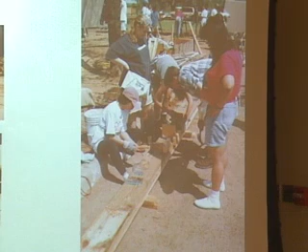So here's what I'm saying. On the right here is Beatrice, and this was her house. She had a family with 2 young daughters, and she came into our studio, and we competed against each other in teams to try and come up with the coolest house to build for her. As you can see here on the left, this was my team's proposal. We built the model out of basswood. It was precious. It was a beautiful object.

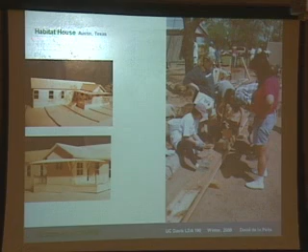It wasn't for her. We said it was for her, but it really was for us. It was for our portfolios. It was for our agendas. And what we didn't do was recognize our own biases, our own interests were at play in how we were designing this project. We weren't really doing it for her. And that's all I'm going to say about that, because it makes me a little sad.

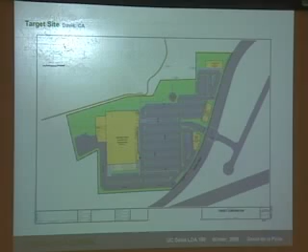The house was actually built. I don't think it's any better than a normal habitat house. But maybe we could have built 2 habitat houses in the time that we built our crazy one. So some of you know this project.

And another ambivalent project of mine that I got my hands into. This was the original proposal that Target presented back in 2003 or 2004. And it's being built right now.

And I was practicing architecture at the time, and a friend of mine, Z. Smith, and I saw the plan and were just horrified at the amount of pavement on this site. Actually, the slide you see here shows color on it. The original one didn't have any color, and when they realized that people like me were going to get upset about it, about the amount of paving, they put some green on it, and they painted the buildings yellow to make it friendlier.

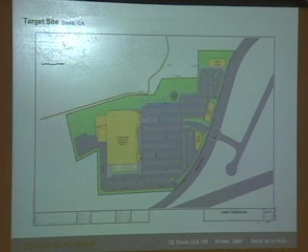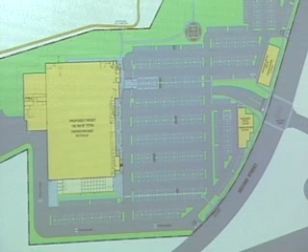This project, I think, for me, represents a type of activism that you all can be involved in, and this was my first taste of being involved in it, and it's sort of a civic engagement, sort of civic activism. Again, you have skills, and if you bring them to the table, you have power to influence people and to make people change their minds about certain courses of action.

In this case, this was the Target proposal. It really looked like the City Council and the Business and Economic Development Commission were going to probably approve this. And there weren't designers on those commissions.

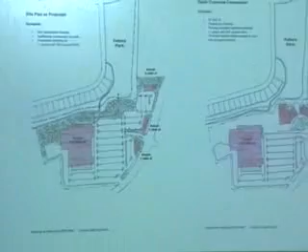So my friend and I did this little exercise to demonstrate to them how it could be different. The way these types of projects get replicated over and over again is that people can't imagine the alternatives. So as designers, you have this ability to bring forward alternatives, visions that the community can appreciate.

I'm just going to go through this really quick. Looking back at it, our proposals weren't great proposals, but what they did do was present something clear that people could relate to and understand.

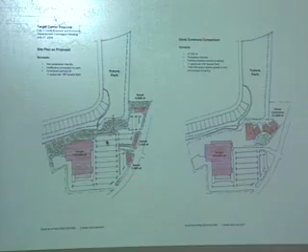So we took the original site plan, there it is, right here, which had a lot of parking, and they said, well, maybe there would be a future bridge across the creek, but then it just had these 3 little pads for retail restaurants. And what we did was we superimposed the Davis Commons onto the site plan to show them they were missing an opportunity with the size of this site. The Davis Commons where the Borders is.

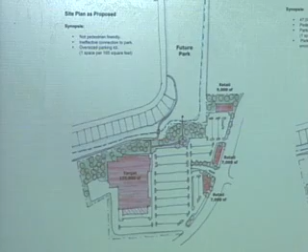And not to say they should do this there, because they shouldn't, but to say here's what you can do with all of this land. It doesn't all need to be parking lots. You can group these buildings together. And my friend Z and I printed these out, and we went down to the Business and Economic Development Commission meeting and sort of stormed in and made them listen to us. And they have to listen to you, because you're a citizen. They have to give you your time.

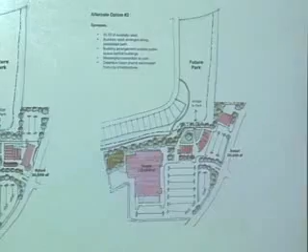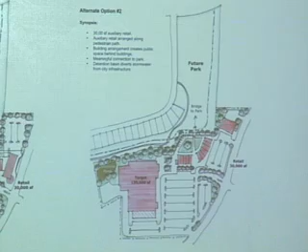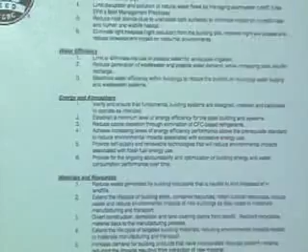And the funny thing happened, they listened to us, and not only did they listen to us, they said to the Target representative, John Dews, I still remember him, forget your plan, do this one. So they made a motion. They said, we want this plan, alternate number 2. And they sent Target back to the drawing board. And that was a real eye-opener to me, just to see how two people could go into a meeting and change the course of something that seemed so big. And it was because we used these skills we had to take something we've seen somewhere else and put it onto a plan.

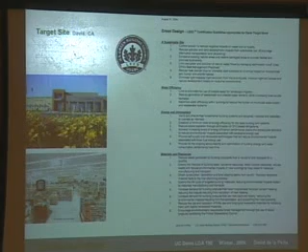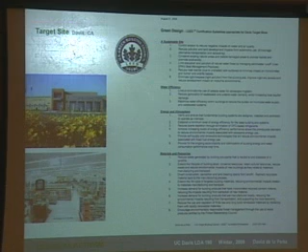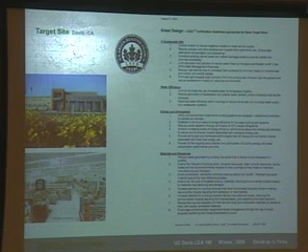The other thing we did was introduce the city to the LEED certification process. We went to the city council meeting and said, okay, now you're going to allow this building with a slightly different configuration, you need to make it green. And the city council said, okay, we will require that Target get this building LEED certified. So the building going up right now, they haven't screwed it up completely, will be LEED certified. They did kind of backtrack on the site plan, unfortunately. But again, being able to not just present a vision, but present something that can be implemented. So this list of sustainable measures was something that people could take from a designer and put into reality.

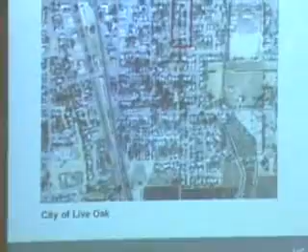Okay, now these following projects are ones that I've worked on professionally at Mogavero Notestine. Some of them are ongoing. This one is ongoing. And these are a little different. So this is sort of activism with a client, with an agency client.

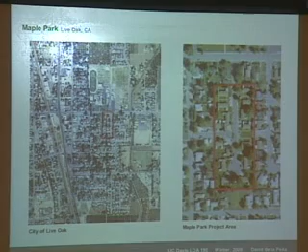In this case, this is the town of Live Oak, which is about an hour north of Sacramento. The client was the Sutter County Housing Authority, and they have this property with 20 duplexes arranged in no apparent order on this site. So what we did was a really careful analysis, looking closely at the community that had been created and the impacts of all the different systems on people's individual lives and how people were adapting to it. So what we have here is a really wide street, no trees, driveways here and there, parking areas.

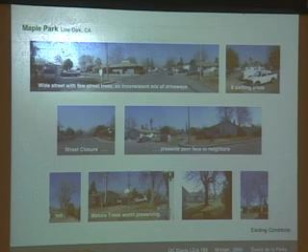They had closed the street off completely to traffic because the neighbors didn't want public housing in their neighborhood. And the housing authority thought that would be a good place for a trash dumpster. But on the other hand, there were a lot of mature trees, really beautiful London plane trees and valley oaks. The buildings were in really poor shape. And the way they were arranged, they had backyards, a lot of open space, but no porches, no doors even to the backyards. So this is a structural problem where the way the neighborhood is structured wasn't giving people opportunities they may have wanted to have a sense of community.

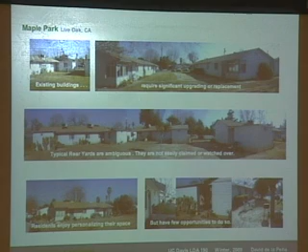There weren't common areas that were clearly common and shared. There weren't private areas that were clearly places you could claim as your own territory. There weren't places for people to express their own ideas, their own individuality - that could be as simple as a small stoop where people put plants or other decorations. Instead, people were still living here and adapting the space to their own needs, but it was very subpar.

So this project, I think, accomplishes things by presenting a vision that's very clear and very logical and very simple. So here's the original site. The street is actually called Maple Park - not Maple Park Drive, not Maple Park Way, just Maple Park. And the irony, of course, is that there's no park. Actually, I guess the little street closure there that you can see in green is kind of a park, but it's not supposed to be one.

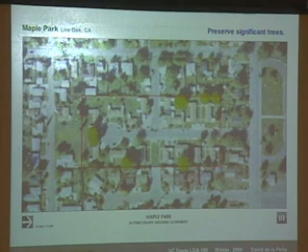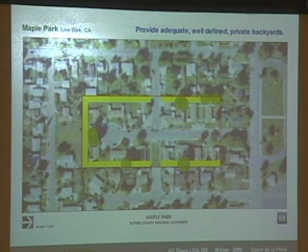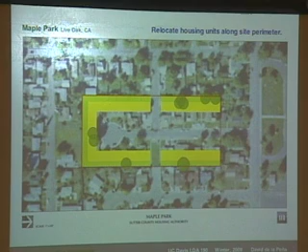So here's the way that we analyzed this and presented it to the housing authority - a set of steps, measures you should take, sort of a strategy and tactics to implement this. First step: preserve the significant trees. Second, provide adequate, well-defined private backyards. Third, relocate the housing units along the site perimeter - and you can see how much space we're getting left over here as we go. Fourth, reconfigure the street network, reconnect the closed street. So we actually did a one-way loop here.

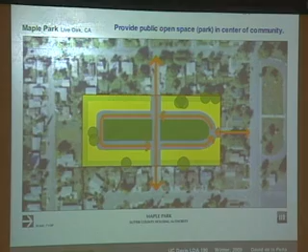What number am I on, 5? 4 or 5 - provide a public open space in the middle. So we reintroduced the park to Maple Park. And this is the site plan, which is a result of that way of thinking.

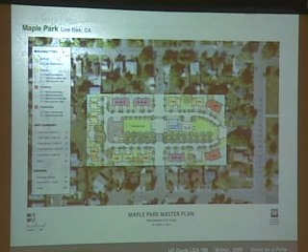Right now the Housing Authority has agreed on this plan. They're making some changes and actually want it denser now. One of the problems was they wanted us to just replace it with as many units, saying they had 30 and still wanted 30, but this plan had 40. The community was so excited about this that the Housing Authority is now thinking maybe they could do 50 or 60, because it's giving such a benefit back to the community.

Anybody know where Wasco is? It's a tiny town, northwest of Bakersfield. It's the rose capital of the world. Something like 50% of all the roses in the country are grown in and around Wasco.

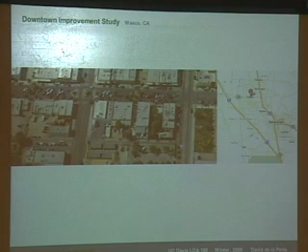So we were hired—here's another relationship to activism, which is for a client, for an agency. The planning department and the redevelopment agency hired us to come down and do a downtown improvement plan. So we spent a few days down there.

I'm not going to get into all the details of this project, but one thing stood out for us very clearly: there was a huge disconnect between what the planning department was trying to do and what the residents wanted.

Wasco's in a complicated place culturally right now. It's gone from being about half white to being 90% Latino, and so it has a large migrant farming population. And something happened at this meeting.

I'll show you this. The city manager was really proud of this clock tower, and they showed it to us as we walked around downtown. We thought, fine, it's a nice clock tower. They said it's actually on the brochures of the manufacturer now—on their front cover. They like it so much.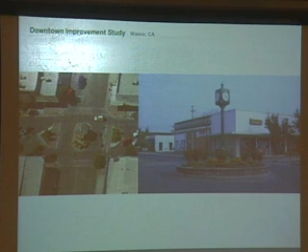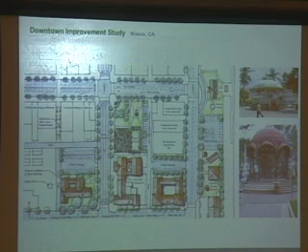Through the process we got beyond the arguing, and we realized they weren't going to put the gazebo back. But we did make a proposal that in the park they had just started right here in the downtown, they should first of all have a rose garden, for goodness sakes, because it's the rose capital of the world. But they should also have a gazebo. This was a plan we put together just to get people to see the potential, but we told them: don't go do this—go have more public workshops and design this gazebo with the community. I hope that's what they're going to do.

I'm going to breeze through this. This was a plan for the overall downtown.

Okay, this project is in Sacramento, in Oak Park, which is sort of the historically disadvantaged neighborhood, southeast of downtown. It used to be on the streetcar, so it was one of the very first suburbs. It's always had a really diverse ethnic population, from Russian and Eastern European groups to mostly African-American groups in the 50s and 60s, and now is just one of the most diverse neighborhoods in Sacramento, which is one of the most diverse cities already in the country.

And the neighborhood has lots of structural issues, which we found out about. Our task was to do a streetscape project for Martin Luther King Jr. Boulevard, and to do some improvements, infrastructural improvements in the neighborhood. And it was a really big project.

This was our team, an out-of-control team of a lot of different individuals, including, I think you met Paul Zajkowski. There's Paul in a nice fluorescent vest. Civil engineers, landscape architects, economists,

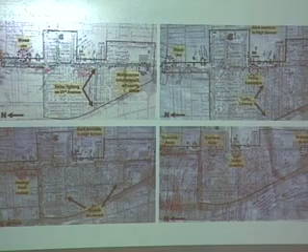which is knowledge of their community. So somehow you need to get their knowledge out in the format where they have the most strength, which sometimes is just narrative. So we interpreted all of this into an overall plan that, for one thing, improved the overall streetscape along the street. I think we're adding something like 300 street trees along this stretch, undergrounding utilities, coloring the bike lanes, adding bus shelters, etc. And then also we looked at a few target sites.

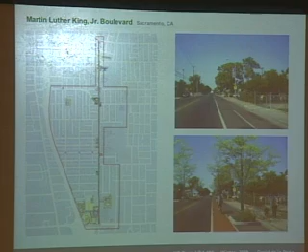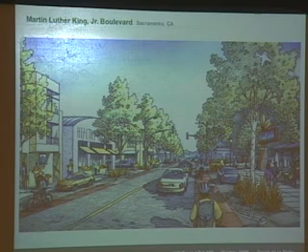This was a rendering that I did not do, but we had done, which is really a useful tool for creating consensus in a community and for creating momentum for people to want to push towards something. If you can't see what it is that you're aiming for, it's hard to get there. So these sort of gave the community a target.

And a few really interesting things came out of this project that are sort of special to me. Sometimes I've struggled with this idea because these haven't come out of the community directly. It's not like community members drew these things out and said, this is what we should do here. They came from myself and other designers, but they came after sitting around with people and understanding their community in a lot of depth.

One of these was a problem that was identified by the community, which is this really horrible intersection here where they had a traffic signal right here. It says Sacramento Boulevard - that's the old name for MLK Boulevard.

You can see there's an intersection there on the north, with the traffic light. This is the entryway to the community center—it was a driveway, and it was just located in a horrible spot. It created all kinds of traffic problems, and it really was not worthy of an entrance to the center of their community.

We saw that as an opportunity and proposed that they realign this road to the north. What they gained out of that was a real civic plaza, and I can see that over here. Just by relocating the street slightly, it's safer. We opened up this space, which will become basically a new civic plaza, and they're envisioning farmers markets there, health fairs, that sort of thing.

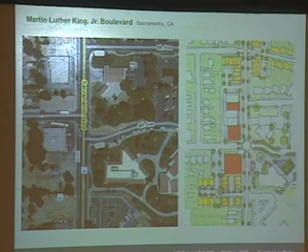Here's a view of that corridor, or that intersection.

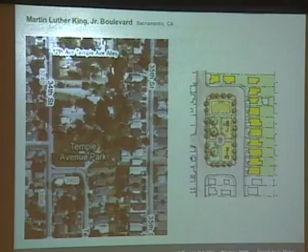These lots, as they are now, are 300 feet deep, which is a big problem. That's way too deep—a normal house in Old North Davis is, I think, 100 to 120 feet deep. So these are really, really long, and they present problems for police and fire. I'm not sure if this one's going to go that far, but I hope that they do something along those lines.

So here's a sketch in search of a place. We noticed there were a lot of vacant lots scattered throughout the neighborhood and suggested that maybe they could be turned into community gardens. They didn't have to be big—this could just be one house parcel. We suggested they put it on a corner so that there's a sense of security, and the community really liked this idea.

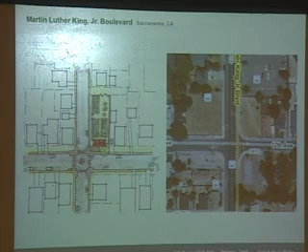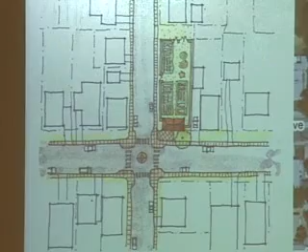And the city has since identified a corner on Martin Luther King Jr. Boulevard right here. The city owns this property, and they're working right now with the Parks Department to put a community garden here.

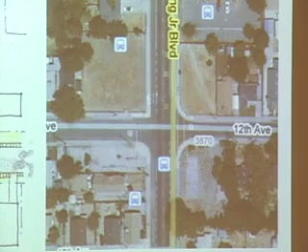And with any luck, they'll bring the community in to help them design it, or students to help them design it. If any of you want to be involved in something like this, let me know.

One of the things I learned through this project—here's a graph showing the ethnic diversity of this community. One of the lessons was it's really hard in a community process to get representation from the entire community. This community has, I don't know, 15 to 20% Asian population, and we had no Asians show up to our meetings.

We thought we tried, but we didn't try in the right way. Later, we found other ways that we should have communicated with the Hmong neighborhood, for example, which was not through flyers in English and Spanish, but through radio, through Hmong radio. It's really hard—it was such a big project, it sort of got missed, but it really shouldn't have. So setting up the process is really one of the most important things you can do.

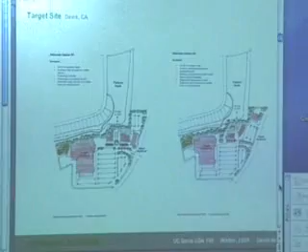They're building LEED certified, but you said they went back towards the initial idea with the area around it. They did redo the site plan, very much along the lines of this, the one on the right. That was their initial stab.

Halfway through the process, they worked with city staff and put another pad, taking a little off and placing it down in the middle of the parking lot. What we were trying to get them to avoid was creating just a little satellite Applebee's or something everyone would drive to from Target. The way it was arranged, you wouldn't walk from one side of the parking lot to the other, it was so vast. So they did sneak one, migrating it carefully down to the bottom.

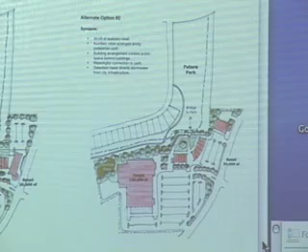It's an important question because I didn't follow the process all the way through. But these kinds of projects require somebody to really be vigilant, to be there as an activist, not just come in and leave, but to have an ongoing presence.

One way to do that is to actually get on the committee, on the commission. I was on the planning commission for a little over a year in Davis, and it's a really useful way to contribute. There aren't enough designers on planning commissions and city councils, and there are some students that do that too.

With that project, the target site, you said you went into the city council and gave them a proposal, and they were all for it as soon as you went in there. Well, what would happen if they weren't for it? What would you recommend if we're having trouble selling that vision?

That's a good question. It wasn't that they were all for it automatically. There was some arguing going on about whether this was feasible or not. You have to come with a set of really clear, understandable steps that they need to take.

And you have to be political. You have to think about how to put this in front of them in such a way that they cannot say no, that it would be embarrassing. In the city of Davis, it's easy to do when you're talking about the environment, because nobody wants to say on local television that they don't want a green building. So you have to be really careful about how you present it.